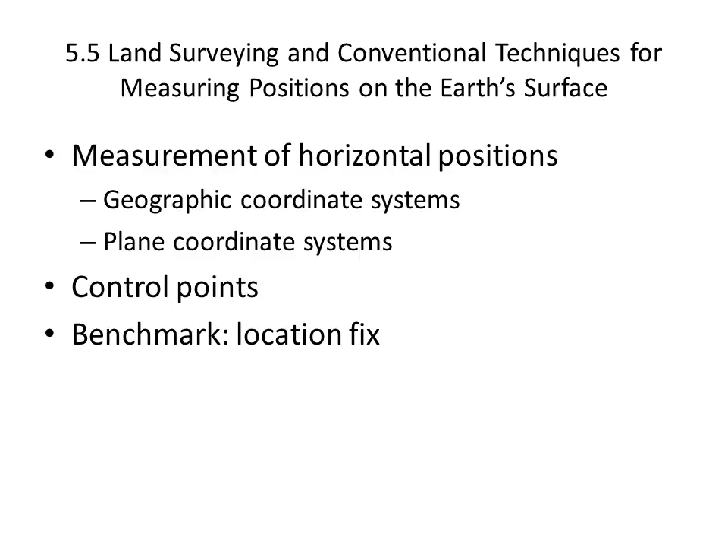In this section, we'll look at GPS and surveying and comment on some of the traditional methods of surveying as well as the role of GPS in land surveying. In surveying, surveyors measure horizontal positions and they're recorded in either geographic coordinate systems or plane coordinate systems. Control points are used as well as benchmarks to understand location fixes.

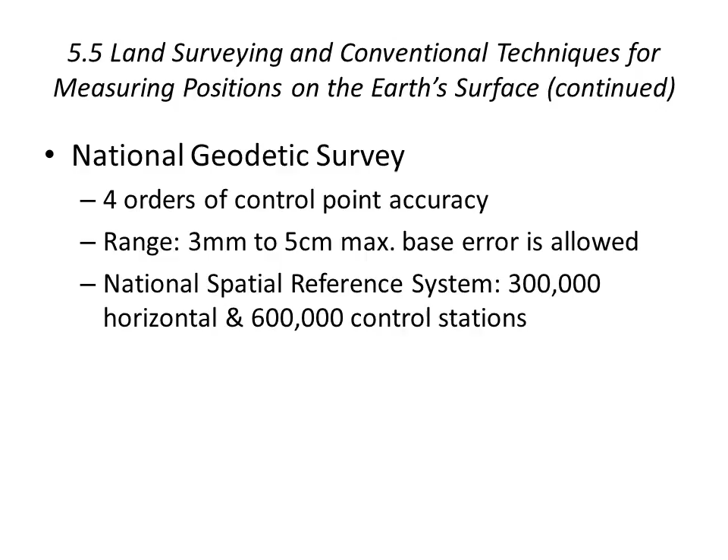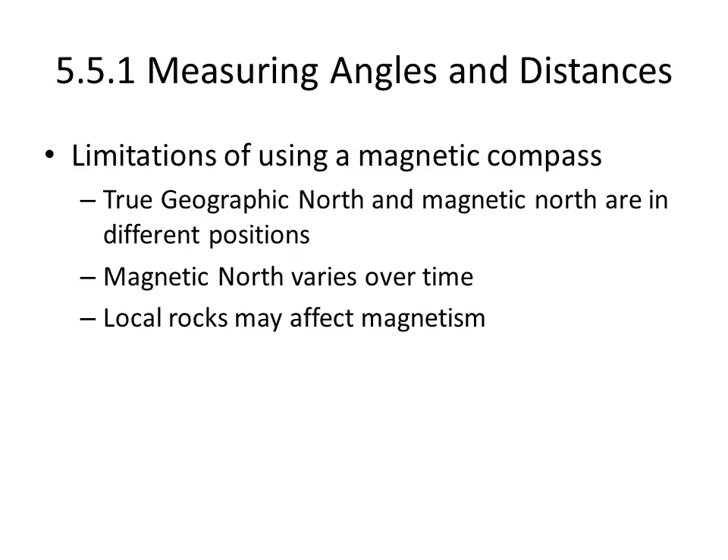Limitations of using a magnetic compass in comparison with other methods are that true geographic north and magnetic north are in different positions. Magnetic north also varies over time, and rocks may affect magnetism. So surveyors over time have looked for alternatives to compass readings. One of those is the transit.

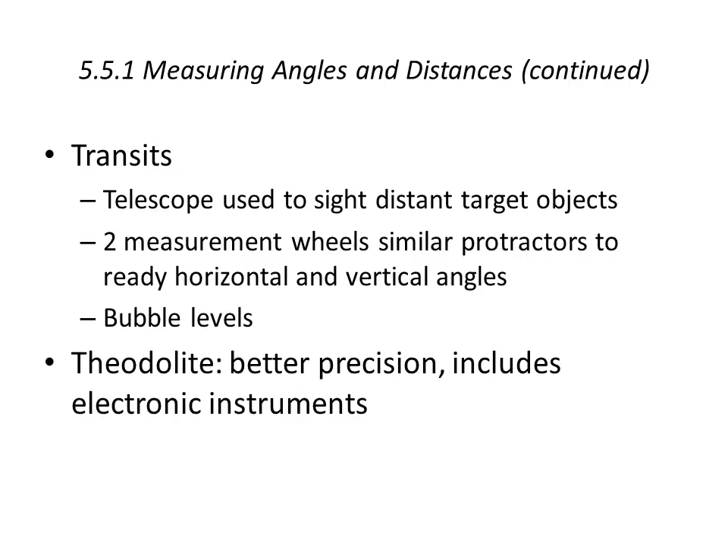Angle measurements include azimuths and bearings. Azimuths range between 0 degrees and 360 degrees and are measured clockwise from north. Bearings include angles less than 90 degrees, are measured within a quadrant, and are defined by cardinal directions. For example, south 45 degrees east and 135 degrees are in the same direction.

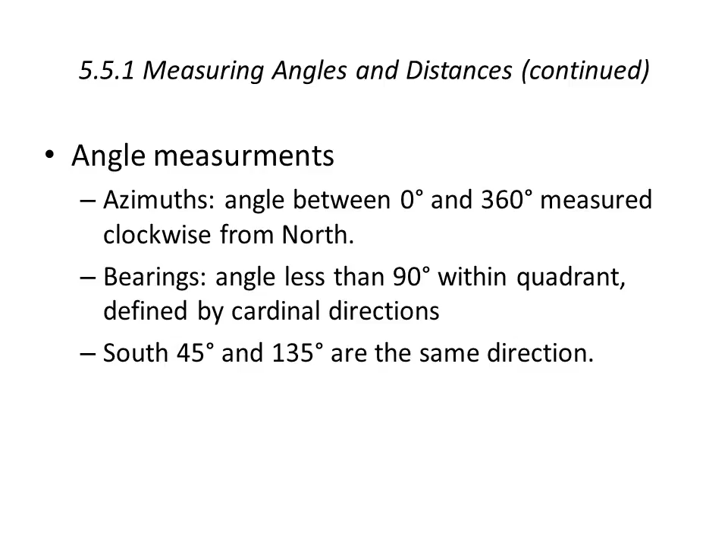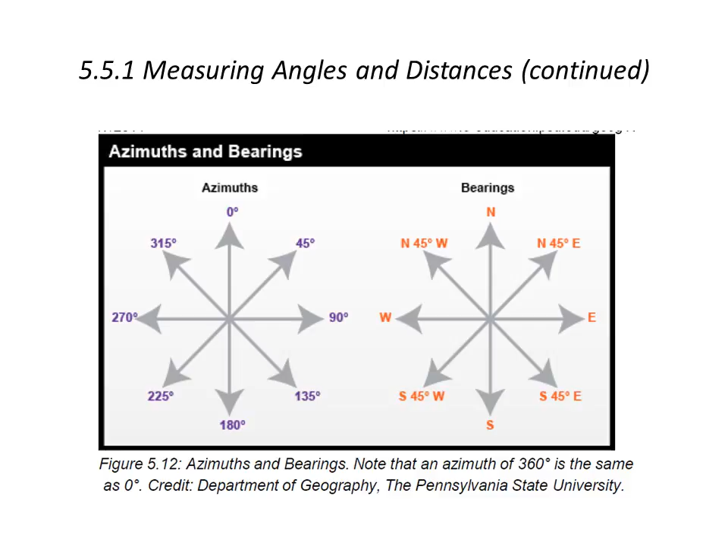Here's an example that compares the two. Compass bearings are on the right and azimuths on the left. So notice, for example, north 45 degrees east shows you that angle is halfway between north and east, whereas 45 degrees in an azimuth shows you simply that it is 45 degrees away from 0.

In measuring distances, metal tapes in 100-foot lengths were used prior to the 1980s. Electronic distance measurement replaced tape starting in the 1980s. This allowed more accurate measurements to be taken. It allowed greater flexibility for surveyors working in the field as well. Total stations include both EDM functions and theodolite functions, and they're commonly in use by surveyors today.

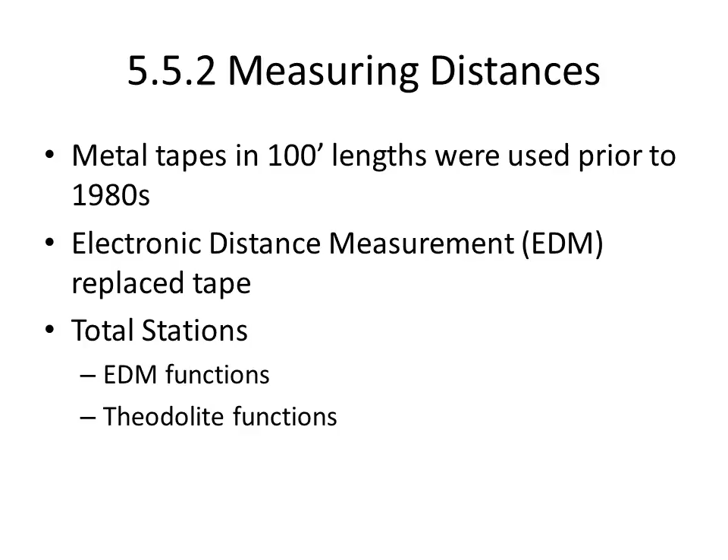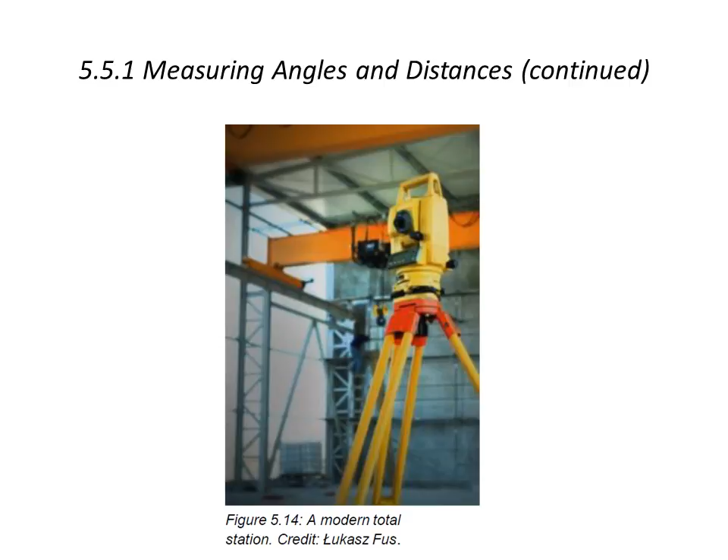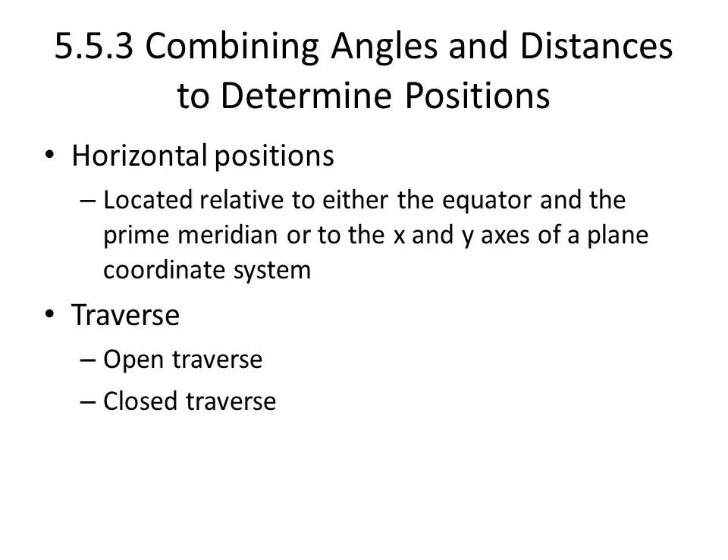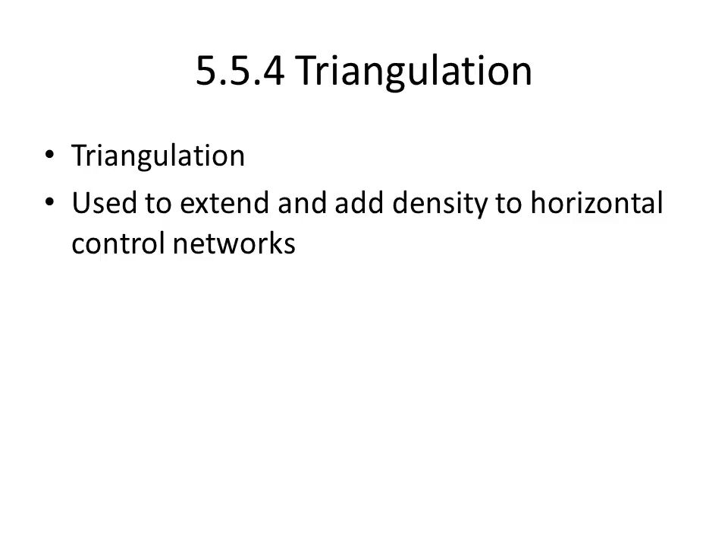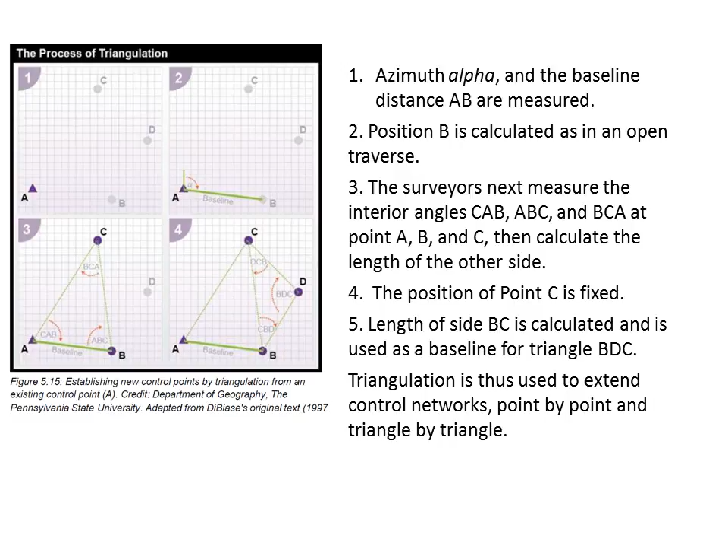The position C is then fixed. Length of side BC is calculated, and this is used as a baseline for triangle BDC. Triangulation is thus used to extend control networks, point by point and triangle by triangle. So additional unknown positions can become known positions through the use of triangulation.

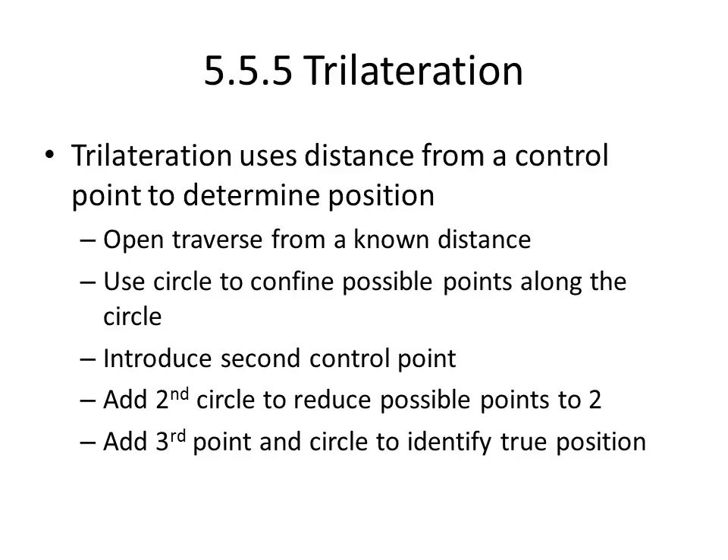Trilateration is another way of using distances to find location. Trilateration uses a distance from a control point to determine the position by using an open traverse from a known distance. A circle is then used to confine possible points along the circle. Then, with the introduction of a second control point, the possible answer points are reduced to 2. Add a third point and the circle may then identify the true position. And this concludes the lecture slides for Chapter 5.